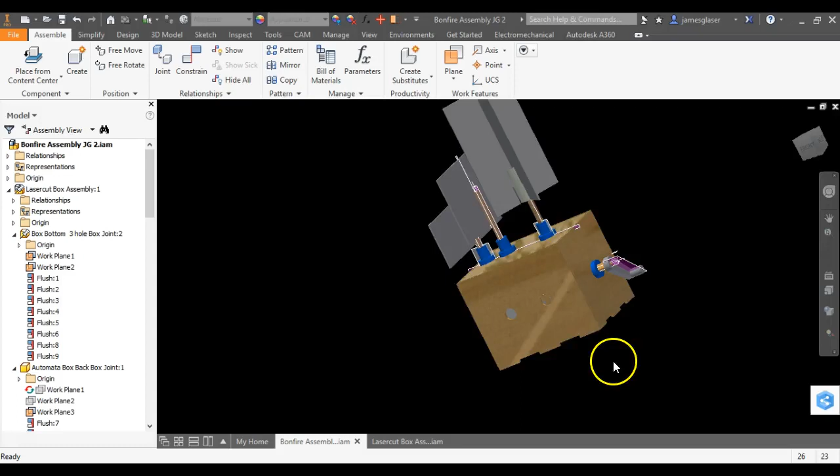Hello everybody. It's time to start moving on to the next step and cut out your box.

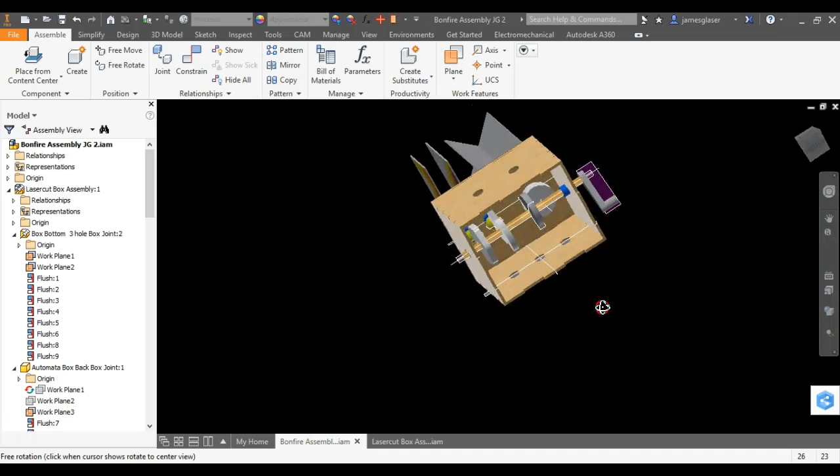Okay, so you've created your digital model of your automata with all of your follower bushings, your model up on top, your follower rods that are all cut to the appropriate lengths, and also your cams are all in there. They're all constrained. You've got your handle, you've got your axle bushings, all the parts. You now need to actually physically create your box. So we're going to essentially be creating that thing.

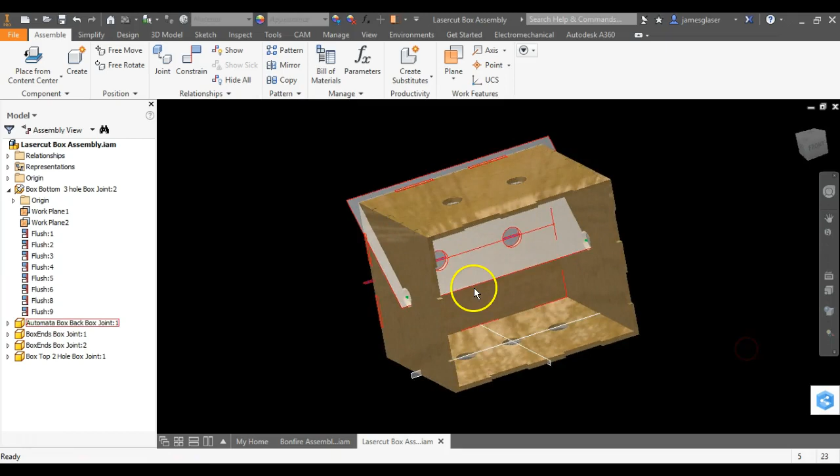Okay. Now, to do that, we need to create a drawing of this. Now, I've got this open right now as a reference, but I'm going to close these out simply because I don't need them dragging down my computer. So we're just going to go to New, Drawing, and it's going to pop up with some sheet that's similar to this. Yours might be different according to what defaults popped up on your computer.

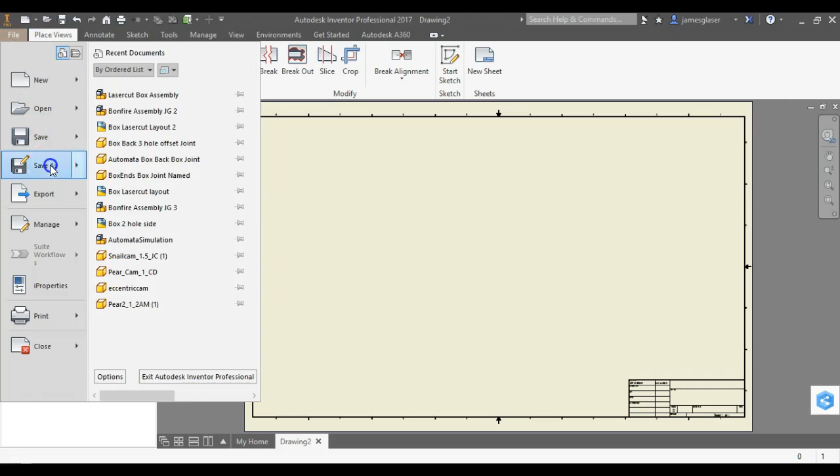We're going to go ahead and click File and Save As in order to create our box layout. So we're just going to call this Box Lasercut Layout 1. Save. All right. Pops up with the name right there.

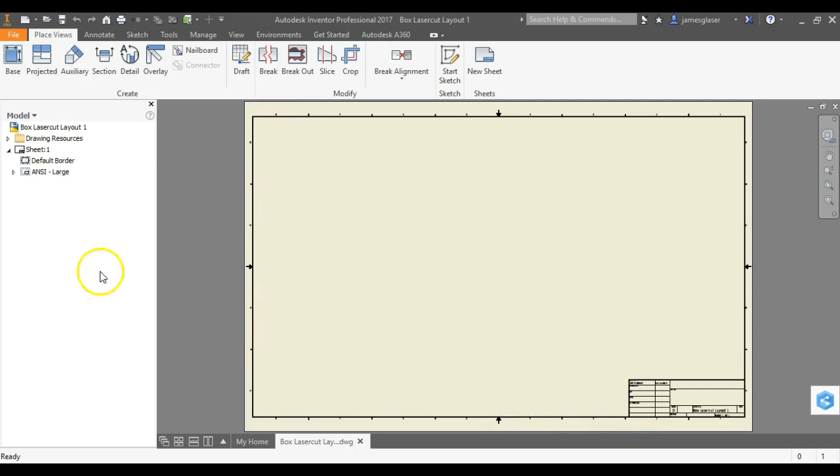Now, this is going to represent the actual piece of wood you load into the laser cutter. So the first thing we need to realize is we don't need a border and we don't need a text box. So we're going to get rid of them. Just right click on them over here in the browser and delete them.

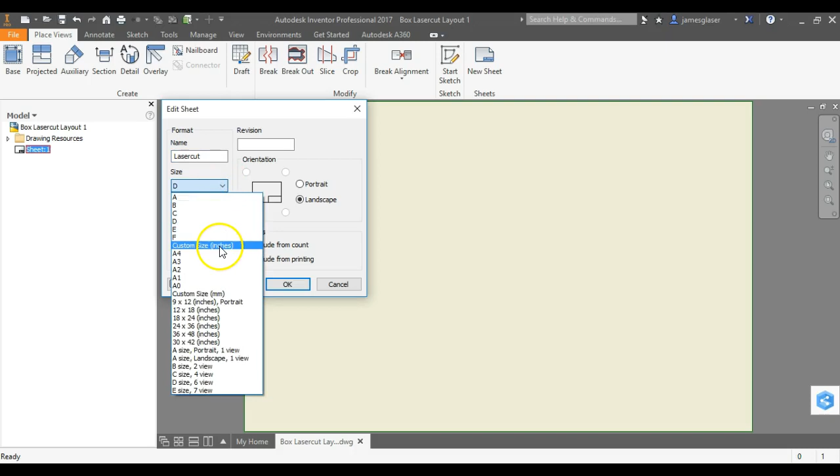Next thing we need to do is we need to make sure the sheet is the right size. So we're going to come up here to Sheet, right click it, and then click Edit Sheet. And we're just going to call this Lasercut. And we have to change the size of the sheet. This is going to be a custom size in inches because the height of our laser cut sheet is 12 inches and the width is 24 because we have a 12-inch by 24-inch print bed. Now we need to make sure that it is in landscape view and none of this other stuff matters. So it should have changed your size and shape of your piece of paper, so to speak.

All right, now it's important that you have all of your parts in the right section. So all of your parts are already in your file folder and you know what the names of all of the pieces are that you want to import. So I've got my box back with 3 holes at an offset. I've got my box side or the bottom with 3 holes. I've got a 2-hole top and I've got the end. I'm going to need 2 of those in one of the other parts. So I can close that and I'm just going to click Base.

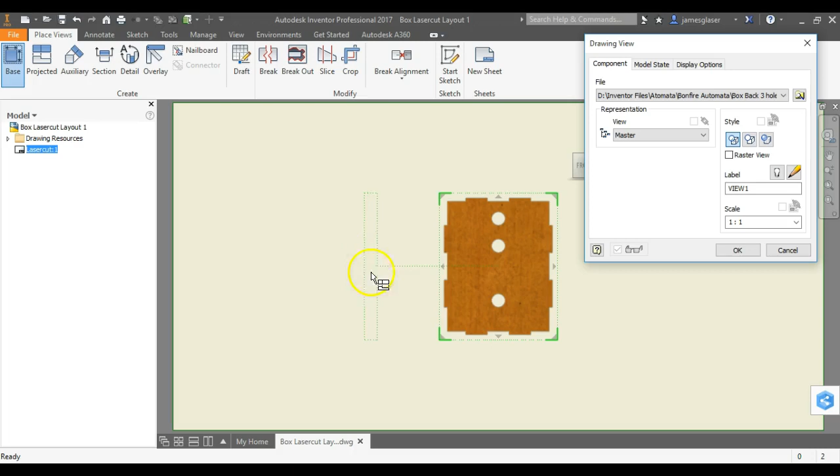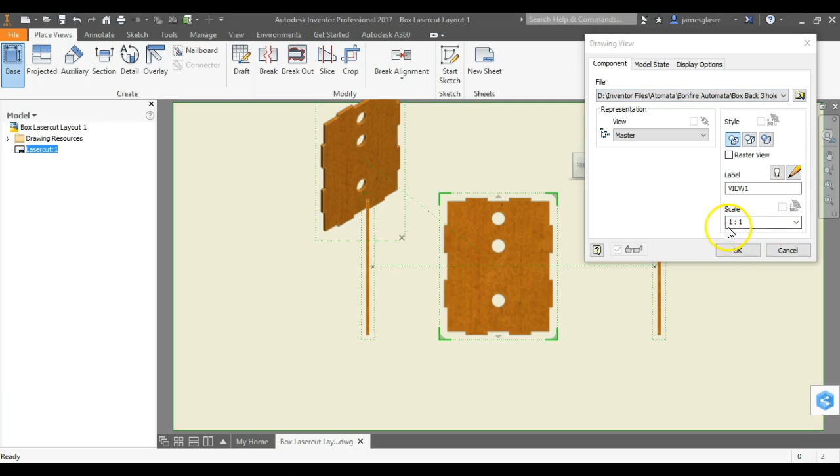Now, what this interface is, a drawing, is it is trying to display your object. So if I drag my mouse over, I'm not holding any buttons, you see how there's this dotted outline that changes shape according to where it's at? Okay, this is trying to make drawings of it. If you wanted to make orthographic drawings of an object that you'd modeled and dimensioned them in here, this is what interface you would use. We don't need any of that stuff. The only thing we really need to do is make sure that it is a 1-to-1 ratio. Click OK. Now it pops up with these simple black and white drawings.

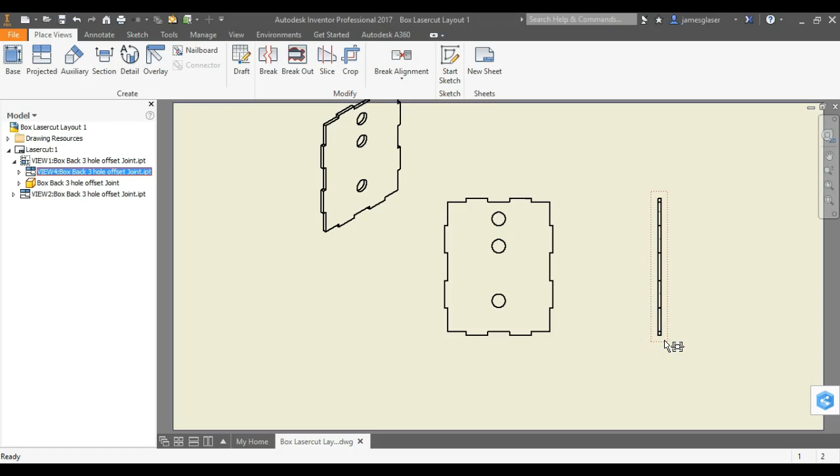I'm going to delete these other ones that I don't want simply by left clicking on it, right clicking, and then deleting it. Okay? Or you can just right click it and then hit delete and click OK. Either way, you click the frame and it applies to the whole thing.

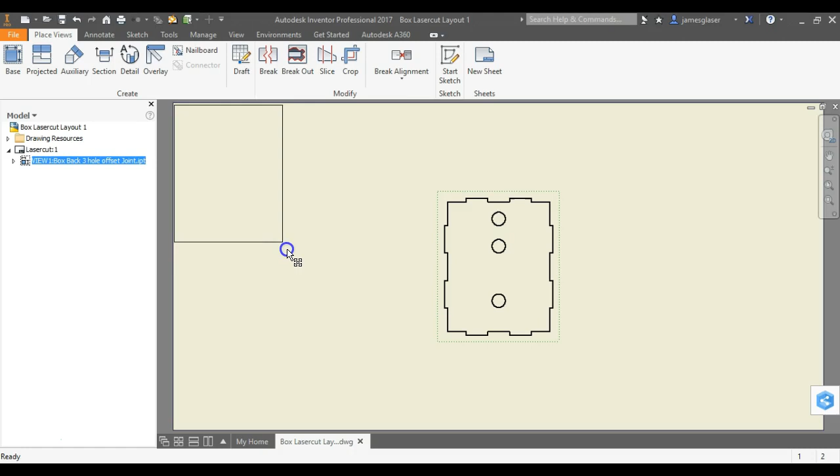Now, I need to actually place this in the right spot because all of my parts are going to dump in right here in the center. So I'm going to just click the frame and take it right up here and give myself a little bit of a margin from the edge of the print screen. See how small that margin is? Okay, I'm not feeling that confident. I want to be a little farther away. Okay, great, beautiful. That one's done.

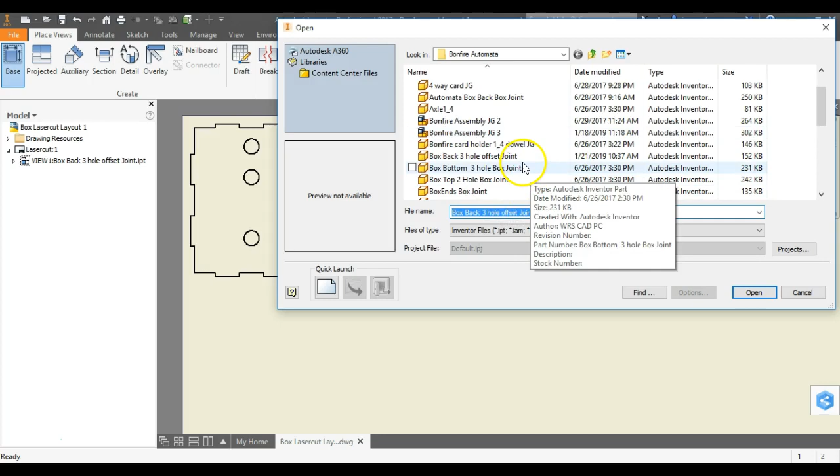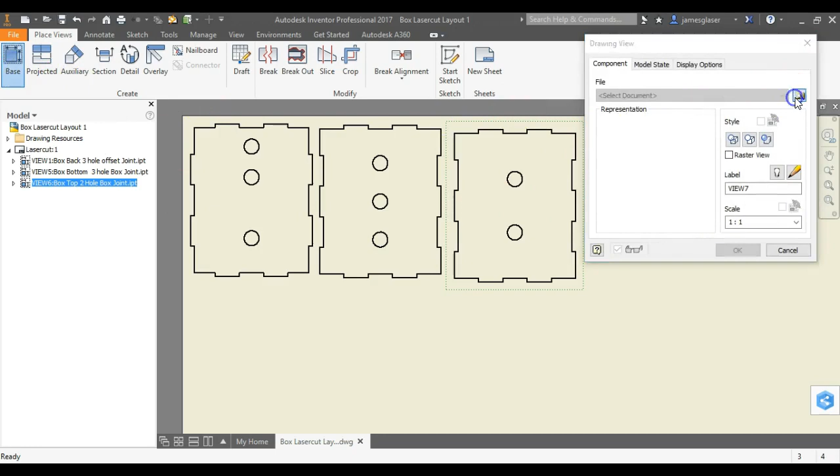Now we need to place the other ones. Unfortunately, you have to place them one at a time. So scale is 1:1. Drag it on up here. And you do this over and over again until all your parts are in the right place. Double click it, click OK. Place. And box end. Okay. Base.

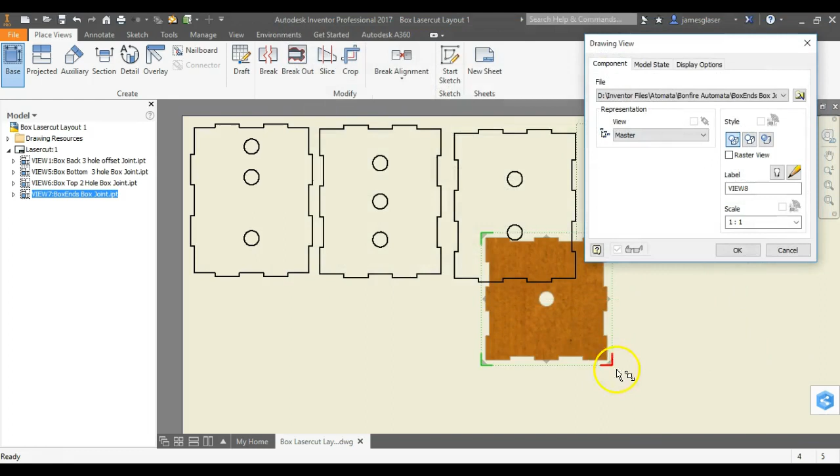Okay, so here are all of my parts in here beautifully on the paper. Obviously, they fit onto my panel of wood that I have to cut them out on. Now we need to change it into a format that will actually be read and interpreted correctly by our laser cutter program. So in order to do that, what we're going to do is first save your stuff. Give it time to think.

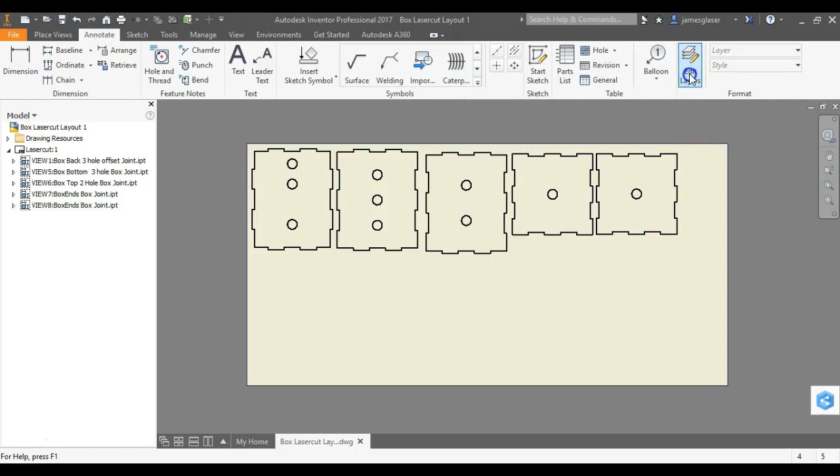Now we're going to come over here to Annotate, and we're going to click Edit Layers right there. Give it time. All right, we want all of the visible lines. Those visible lines are what represent our object, and we want our laser to cut it out along those visible lines. So those visible lines, give it time to think, we want to change the color to red, okay?

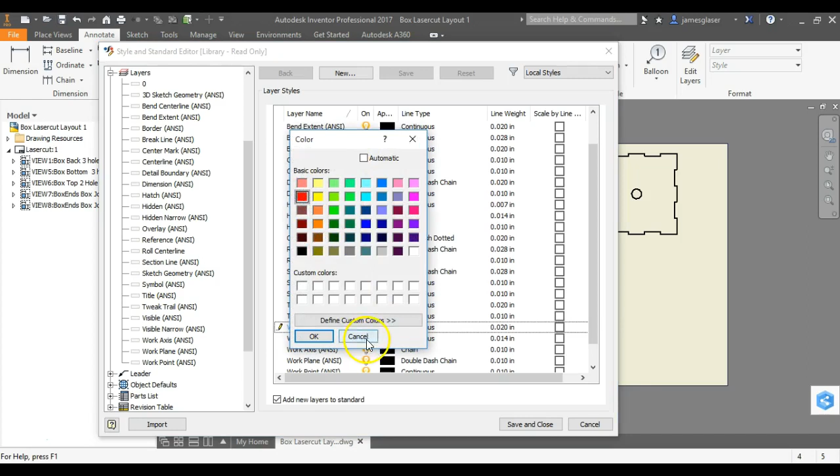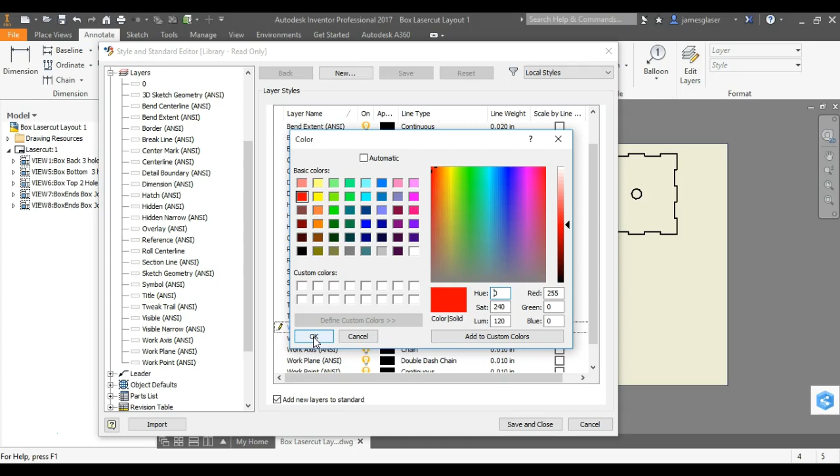Now, this cannot be just any red. I clicked on Define Custom Colors here to show you that this needs to be the 255 red, 0 green, 0 blue. Any other color is wrong. It will not interpret that as a cut. In fact, our laser cutter will only detect 7 colors. Everything else is just gibberish.

Next thing we need to do is we need to make sure our line thickness is the right thickness. It should be 0.001 inches. That's an extremely tiny line. Click Save and Close, and then give it a moment to think, maybe zoom out and zoom in, and it should pop up with everything that you want cut out to be lined in red.

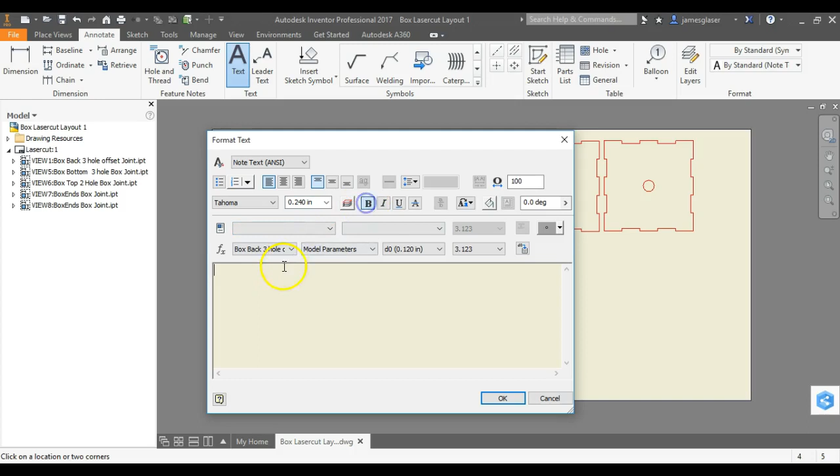Next thing we want to do, I want to put my name on the box, simply because it's mine, I claim it as mine, blah, blah, blah. Okay? Mr. Glaser's box. Okay. And it popped up in black. Now, red is interpreted as cut, black is interpreted as raster. That's something that we want it to do. So now, with everything we want cut in red, everything that we want rastered in either black or blue, we're going to click Save one more time.

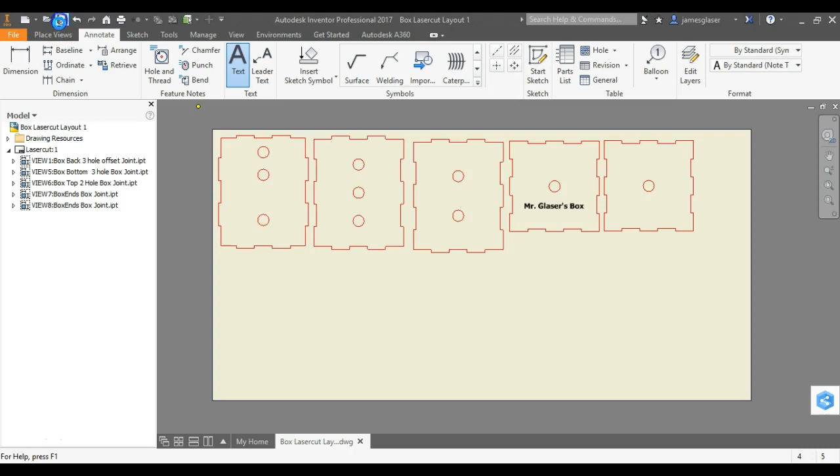Now, we are going to go to Print. Now, this is the part where you need to actually be on a different computer. You will need to be on the computer that is actually hooked up to the laser cutter because your computer does not have the interface that's necessary. But at this stage, after you've clicked Save, you're going to close out. You're going to go over to the computer, plug your flash drive in, and then bring up your drawing in the Inventor program that's on there. You should be able to find it pretty easily.

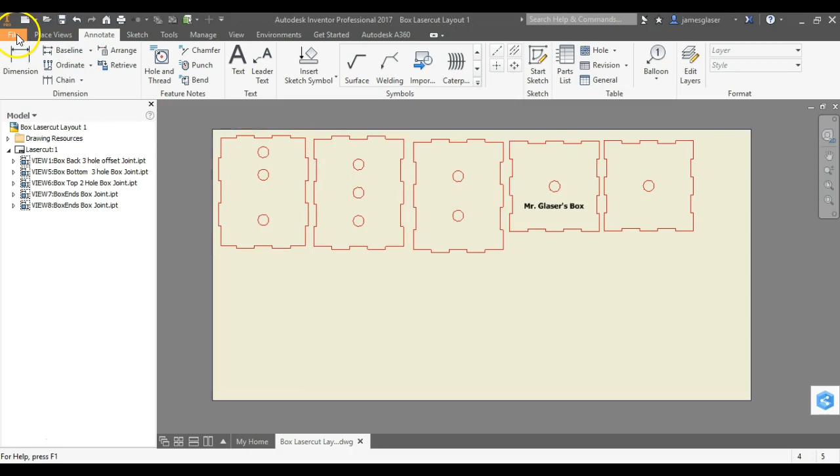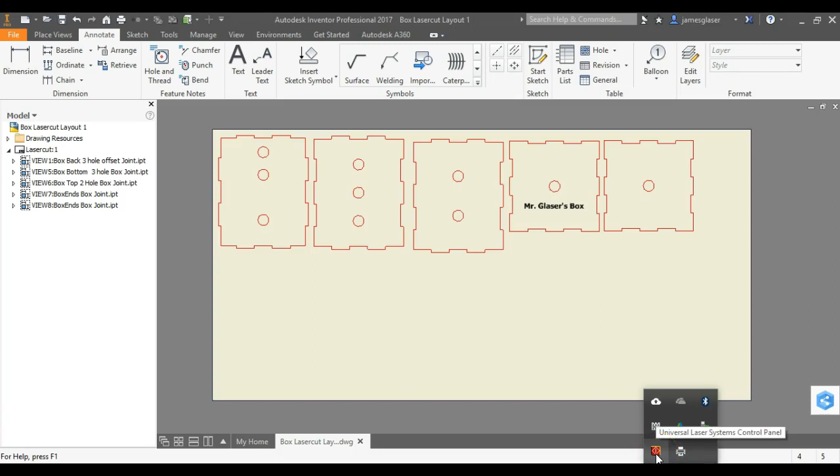Once it's open, you should be able to click File, Print, and it should come up with this VLS 3.50. That's our laser cutter, okay? We want it to be a model that is 1:1 scale. Do not click any of this other stuff. Click OK. And it will magically do nothing but pop up with this thing. Well, what you need to do is show this hidden icon. This is our Universal Laser Systems control panel. When you pop this thing up, it should populate with your drawing that you want cut out.

Now, you will have to change some settings on this. As you get more used to it, you would use more of these colors. For now, we're just using red for vector mode cutting and black for rastering. We are going to be going into the materials database, and we are selecting the material. It is a natural material, it is wood, it's a medium wood, and it's just going to be a general medium wood. Now, our vector performance, we want a nice thorough cut. Also, we need to specify our material's thickness. This is a 5mm thickness material. Click OK.

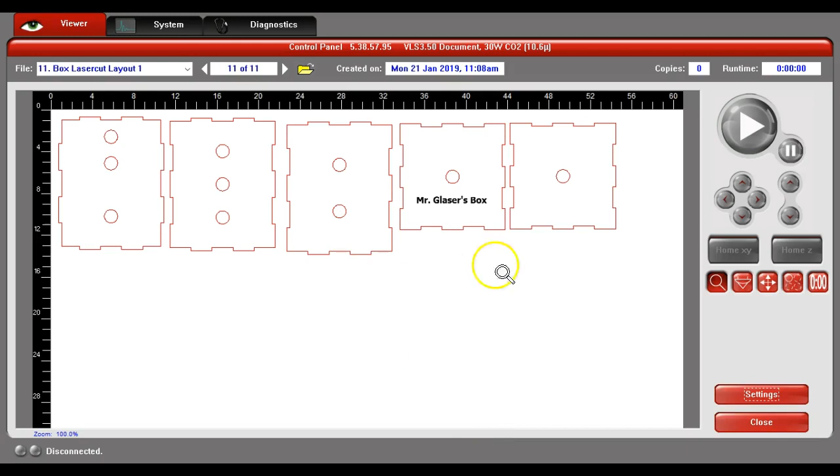Now, once you've got everything set like that, you should be able to click play and it should print it out. But right now, you see how it says disconnected? That's because I don't have my laser cutter plugged into this computer. It'll have a green light flashing there, and it'll say connected there, and then you'll be able to click play because that'll be green. And then it will actually cut out your thing. It will actually raster your name onto your panel.